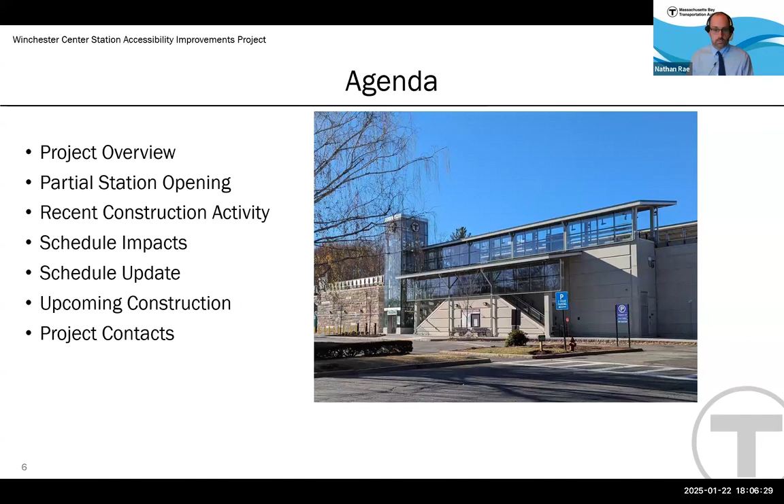For those of you who aren't familiar with the Winchester Center project, what is it we're doing there actually? So it's a full station reconstruction. There's two new fully accessible high-level side platforms with canopies. The former station was not accessible. There will be 3 new elevators, 2 new ramps, and 3 sets of covered stairs. There'll be new lighting, signage, and wayfinding, security cameras, and other amenities. In addition, we're upgrading the track infrastructure - new track, ties, ballast, bridge plates, and communication duct banks all through the station limits. And the total construction cost is $50 million. Next slide, please.

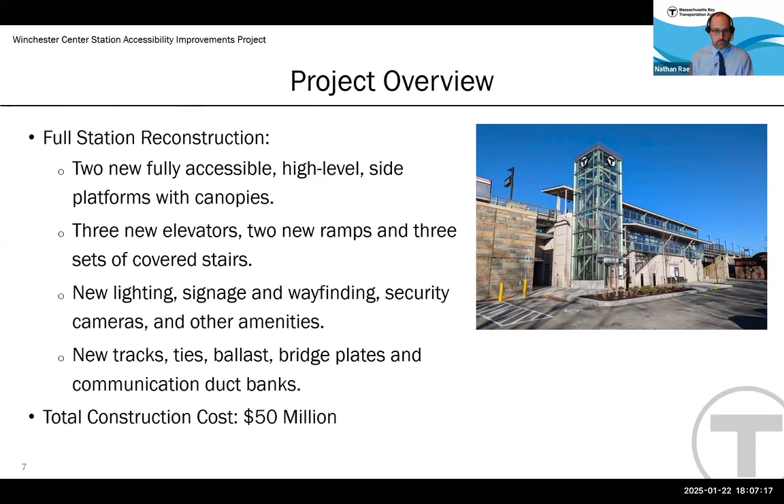As most of you are aware, we partially opened the station last fall, October 1st, 2024. The partial opening included 2 new fully accessible high-level side platforms with canopies. Both platforms were open, basically the southern half of both platforms, so we're running a half a train length currently during the partial station opening. That partial opening also included 2 new elevators, 1 ramp, and 3 sets of covered stairs. In addition, it included new lighting, signage, wayfinding, security cameras, and other amenities.

And all the track infrastructure is done and completed through the station limits.

The estimated daily ridership for the partial opening is about 150 on-offs per day right now. That's not close to pre-COVID ridership levels, but we hope ridership will return to those levels eventually.

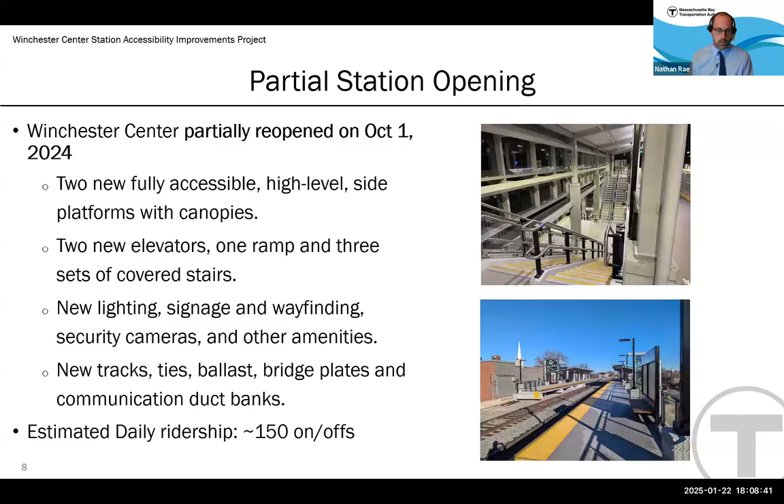I'm going to talk about recent construction activity from this past fall and current winter. On the left there, you see the construction of the 3rd and final elevator shaft. This is the north elevator shaft behind Thompson Street. That shaft is completed, and there is assembly of the elevator cab going on right now at that elevator.

Next, you see a picture of the inbound platform ramp and construction at Laraway Road. And then on the right, again a picture in the similar area, but at the Quill Rotary. This was from last week, where if you live in Winchester, you were aware that we rerouted traffic around the downtown.

To put in the beams and the platform pieces over the rotary, and we're just excited to reach this part of the schedule. Because now we're having all the platform sections in that final ramp, we can begin final assembly of the various activities required to fully open the station.

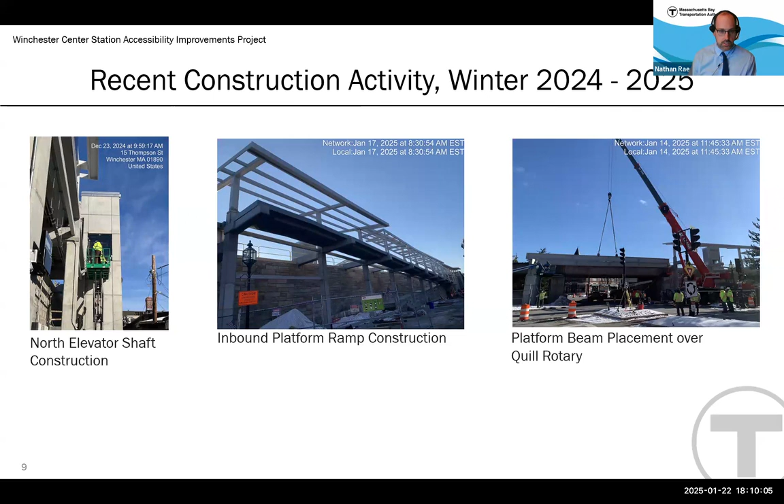Next slide. Again, there's a lot of activity going on around the Laraway Road ramp, the inbound ramp. There was a ramp there before, many of you probably remember, so we're returning a ramp there. There was structural members in place, and those all got encased in concrete, and then the ramp sections got installed recently. And then we come and fit out with guardrails and canopies and drainage, electrical and communications devices are installed.

So there's a fair bit of work left to do. Next, in the middle there, you see further work on the elevator shaft, the north elevator. This is behind Thompson Street at the Quill Rotary. And more concrete platform beam work at the inbound ramp.

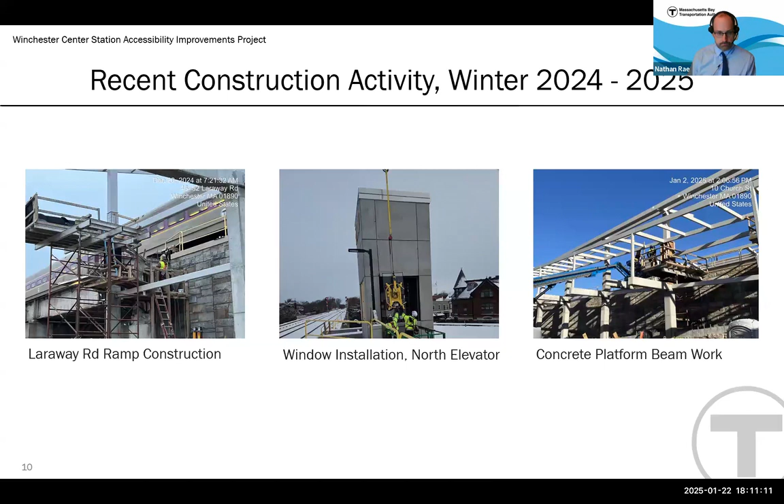Next slide, please. So with all this work going on, when we partially opened the station, we were excited and eager that commuter rail service could return to Winchester Center. Our contractor focused their labor on partial station opening activities, all the activities associated at the south end of the station, which we opened up on October 1st. However, this resulted in some activities in the north half of the station, which involved final completion, falling behind schedule.

And so many of these critical path activities to get to final completion for the station can only be performed during warmer temperatures. We can do things like install platform sections and even pour concrete, but there's some other finishing activities that really have to wait until we have sustained warmer temperatures. Concrete finishing, for example, painting, sealants - these are all elements of final construction that really have to have sustained warmer temperatures. So that is some of the major impact that we've had at Winchester Center.

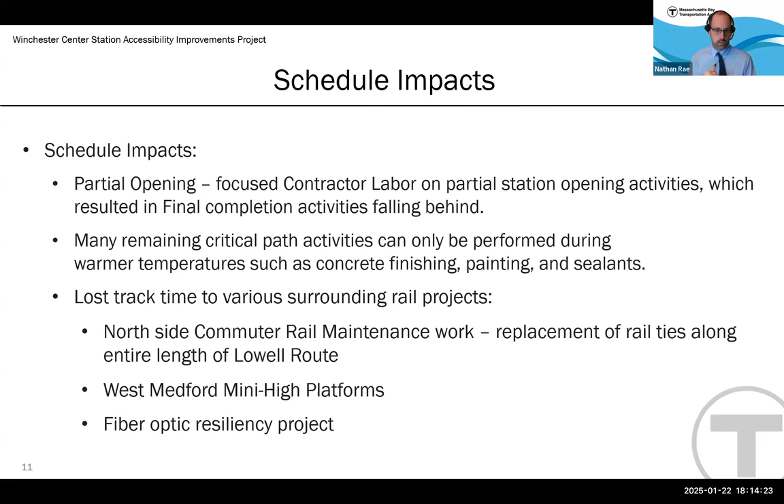We want to announce that Winchester Station is now scheduled to fully reopen in the spring of 2025. By full station reopening, we mean a full platform reopening of the north half of the station, both platforms, inbound and outbound, plus the one final third redundant elevator will be open. We'll be completing work on Laraway Road, and then punch list or deficiency list work, including landscaping, will continue after station opening. Final completion is really scheduled for summer of this year.

Just a note about Laraway Road: we are repaving and restriping it. Working closely with the town for years, I know Laraway Road is very important for parking for residents and shoppers at Winchester Center, so we're aware this is an important piece to open up again. We're aiming for that this spring.

To meet that goal, I want to talk about what we're doing for the rest of winter and spring. Having those platform pieces in is key, because now we can complete the remaining electrical and plumbing work. We'll obviously be focusing on the north end of the station at the Quill Rotary and Laraway Road areas.

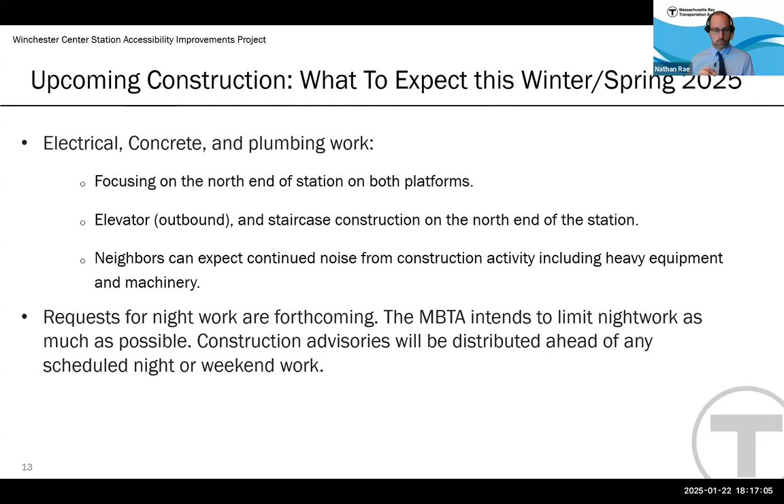A little more detail on what we're doing at each area of the work site. At platform level, the panels just went in last week and early this week. Canopy steel was going in today, as well as guardrails on the inbound platform. All the conduit that supplies power to the platform goes in underneath those newly installed platform pieces, and then lighting poles can be installed, along with communications equipment. This includes cameras and the scrolling electronic signs. Then station signage, benches, and these sorts of things can go in. So that's at platform level.

Behind Thompson Street at the Quill Rotary sections, there will be more plumbing - downspouts, which feed into oil water separators where storm water is cleaned and then released into the storm system. The elevator and stairs will continue going in behind Thompson Street at the Rotary, and there's some final remaining work on the Rotary Pier, including granite to be installed there.